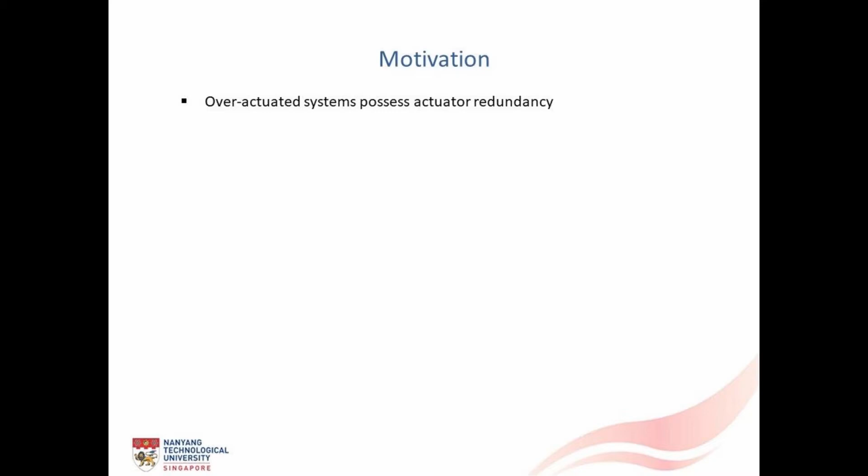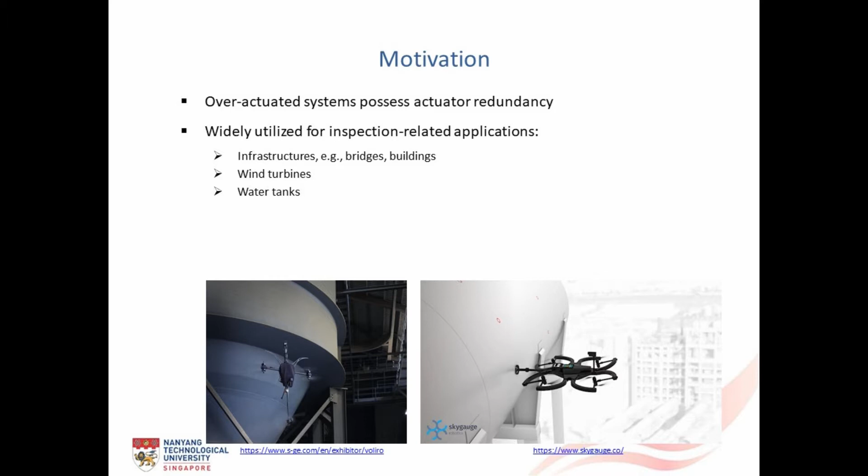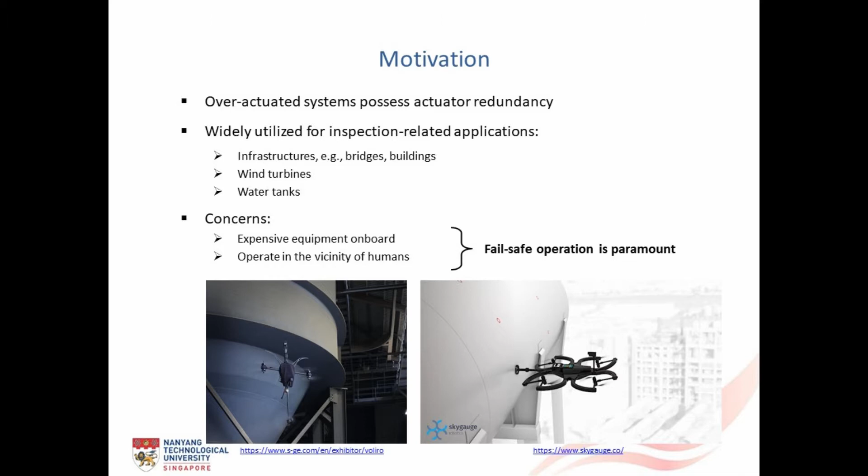Over-actuated systems possess actuator redundancy, thus rendering them highly maneuverable. As such, these highly maneuverable aerial robots are getting widely utilized for inspection-related applications in bridges, buildings, wind turbines, and water tanks. Mostly, these systems carry expensive equipment on board, including LiDARs, cameras, etc. Since they must operate in the vicinity of humans, their fail-safe operation is paramount to ensure safety.

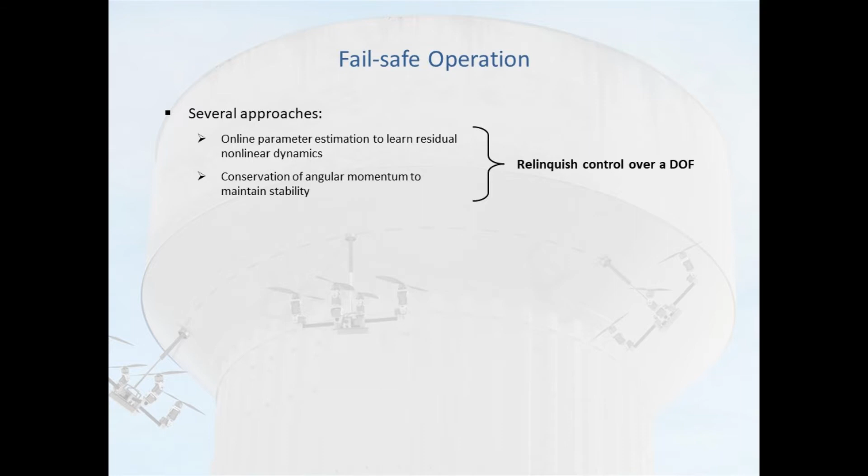Several approaches have been proposed in literature to tackle propeller failure in aerial robots. Among the approaches, the first is based on online parameter estimation that learns the residual nonlinear dynamics and subsequently updates the controller. Another approach revolves around the conservation of angular momentum to maintain stability. However, both of these approaches relinquish control over a degree of freedom. Thus, they are less viable for tasks requiring precise tracking, specifically in inspection-related applications.

Alternatively, an over-actuated aerial robot can handle failures while retaining control over its position and attitude. As such, its control allocation is reconfigured to exploit the input redundancy. However, their control underlies multiple challenges, including the determination of the optimal actuator allocation, as the underlying system is underdetermined.

In other words, since the number of actuators are more than the number of system equations, a unique solution is unavailable. Then there are actuator constraints due to the physical limits. Also, the dynamics become time varying due to the propeller failure.

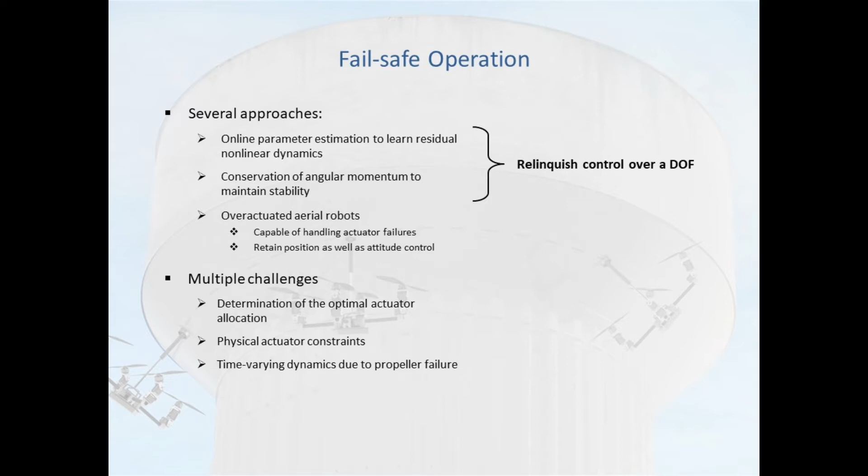Therefore, to ensure safe operation during inspection, we have designed and developed a hyperdynamic quadrotor aptly named as QuadPlus. The novel quadrotor design introduces additional degrees of freedom using biaxial tilting of propellers, rendering extensive thrust vectoring. Consequently, the quadrotor not only stabilizes but also maintains decoupled control over position and attitude even after propeller failure.

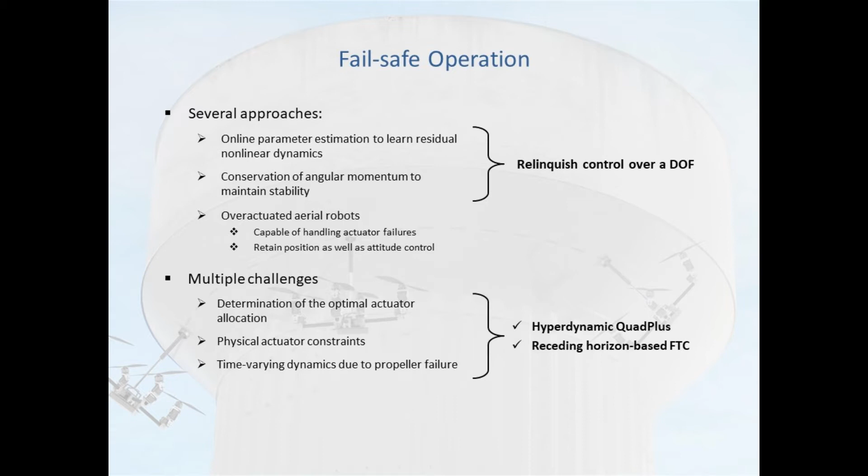Moreover, to cater to the challenges that underlie over-actuation, we propose a receding horizon principle-based nonlinear model predictive control framework in this work. The designed fault-tolerant control framework is centralized in nature that allows full exploitation of the actuator redundancy. I will illustrate the control framework in the upcoming slides.

Now, let me introduce our novel design. QuadPlus is designed to achieve extensive thrust vectoring using biaxial propeller tilting. Each arm of QuadPlus consists of two servo motors for carrying out independent rotation about the lateral and longitudinal axis.

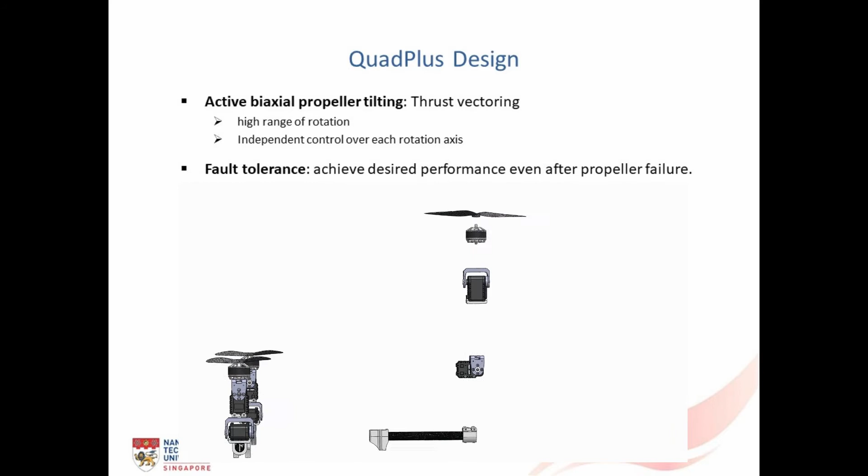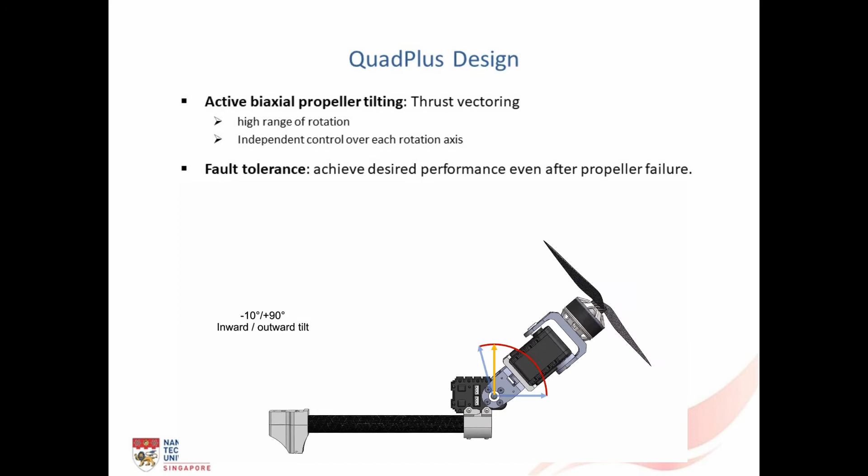Based on this vertically aligned configuration, the proposed design can accomplish an inward tilt of 10 degrees and an outward tilt of 90 degrees about the lateral axis. Similarly, it can accomplish a rotation of plus minus 90 degrees about the local longitudinal axis.

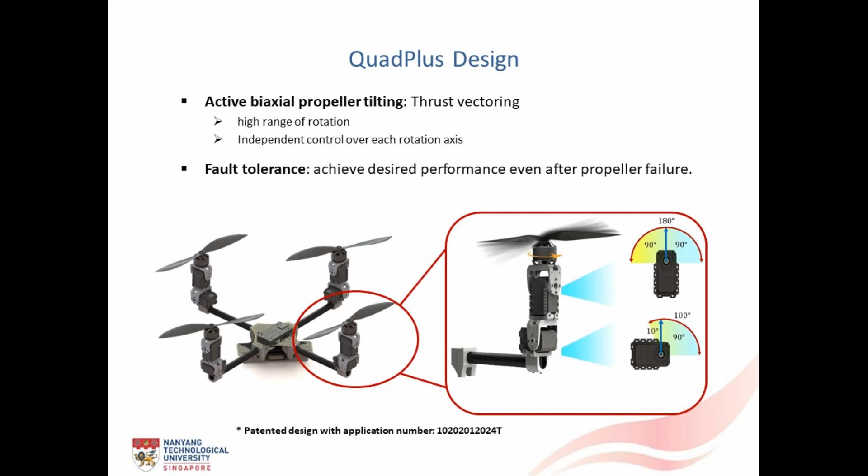With regards to the control of QuadPlus, its 12 degrees of freedom include the 8 servo angles and 4 propeller speeds. These 12 inputs can be used to control the 12 states of the system, that is, position, attitude, as well as linear and angular velocities. The fault factor gamma is introduced during thrust calculation in the simulation, wherein a value of 0 indicates propeller failure.

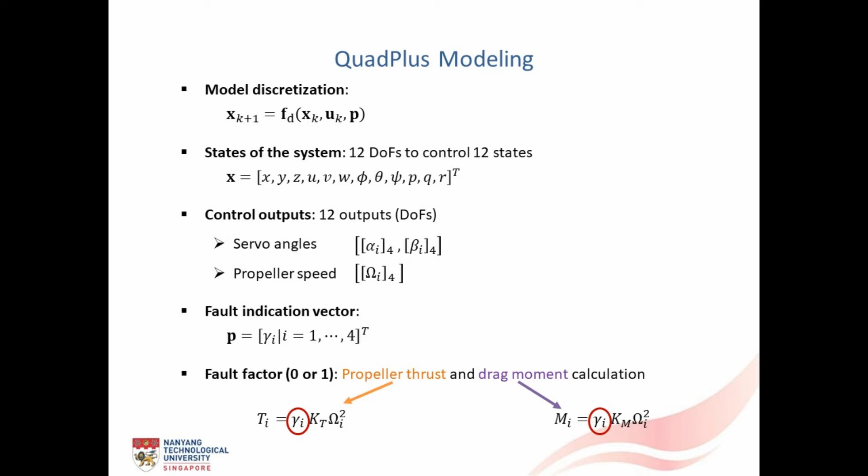The system dynamics involve modeling the forces and moments generated in the body frame. Due to the biaxial tilting, it becomes essential to consider the gyroscopic effects during the moment calculation. These effects are added to the moments generated due to thrust and drag moment of the propellers.

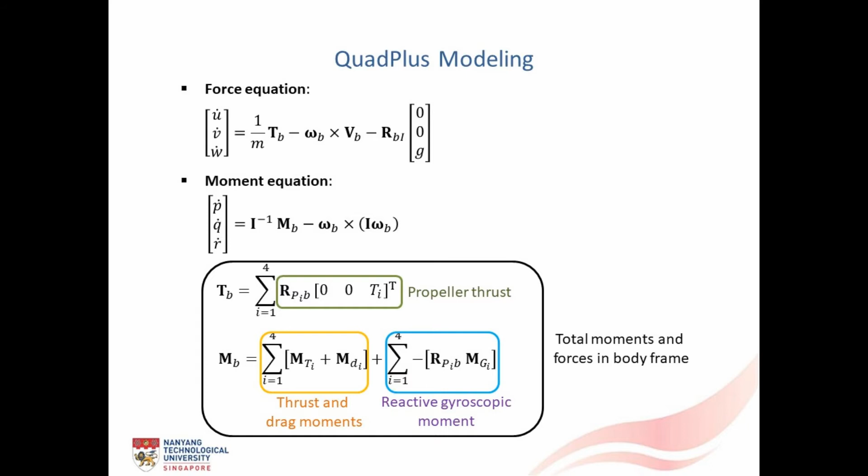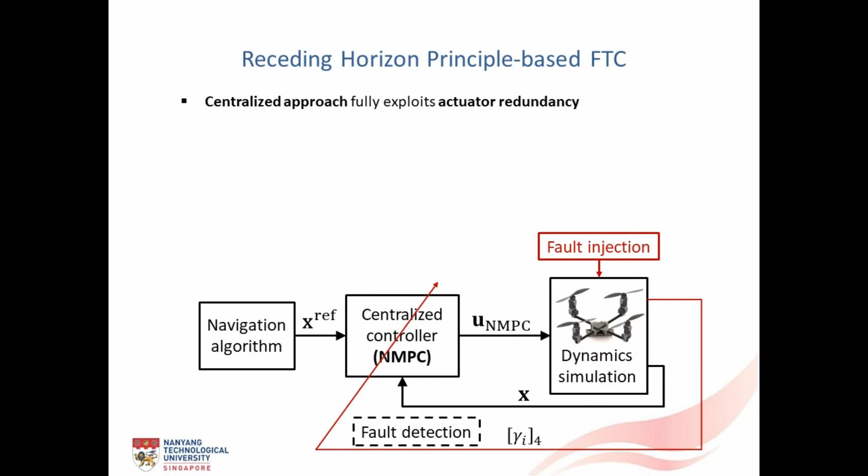Next, I will illustrate the fault-tolerant control framework. In this work, we have adopted a centralized approach that facilitates full exploitation of the actuator redundancy. As such, the designed NMPC algorithm is responsible for tracking both position and attitude references. Accordingly, it commands servo angles and rotational velocities of the propellers, which reflects the nominal operation of the overall system.

Now, as soon as a failure occurs, the designed NMPC reconfigures the dynamic model online based on the given fault information. In other words, the underlying optimal control problem is updated such that the control commands are allocated to the remaining functional actuators. Eventually, this reconfigurability circumvents the need for multiple controllers.

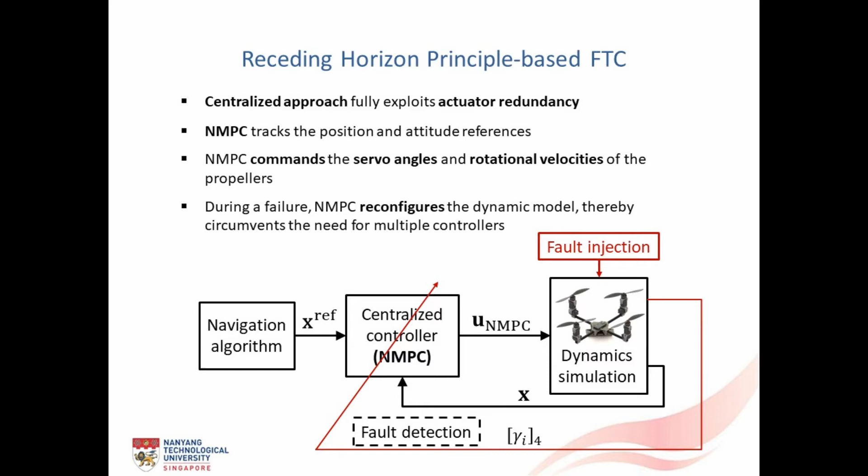Next, I present the design of the centralized NMPC. For tracking the given position and attitude trajectories, the centralized NMPC is designed utilizing a least square problem formulation, wherein the state, control, and parameter vectors are as presented before.

This type of problem penalizes the deviation of state and control trajectories from their specified reference values. These are the utilized state and control reference trajectories. While the state references remain same for nominal and faulty operations, the control references are obtained differently for each case. One may note that these control references are obtained via trial and error method.

Also, there are control constraints arising from the actuator limits. Furthermore, we have selected the prediction window size as 30 for the centralized NMPC algorithm.

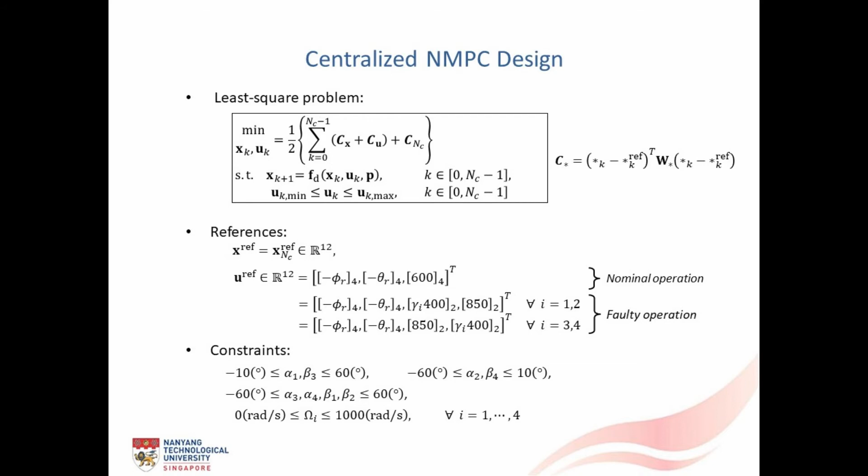Next, I will illustrate a case study wherein we implemented the proposed fault-tolerant control technique for the case of single propeller failure that occurs mid-flight. All the tests are conducted in MATLAB Simulink environment, incorporating the realistic model of the quadrotor presented previously.

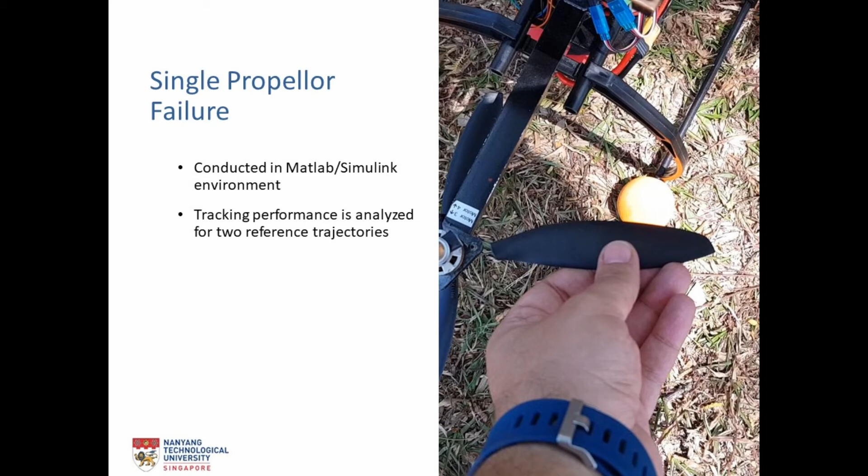The overall tracking performance post-failure is analyzed for two reference trajectories. While the first trajectory is typically utilized for inspection-related applications, the second one is an 8-shaped reference. Moreover, the tracking performance over the second trajectory replicates extreme operation that further challenges the controller. A fixed sampling time of 10 milliseconds is maintained for the entire simulation.

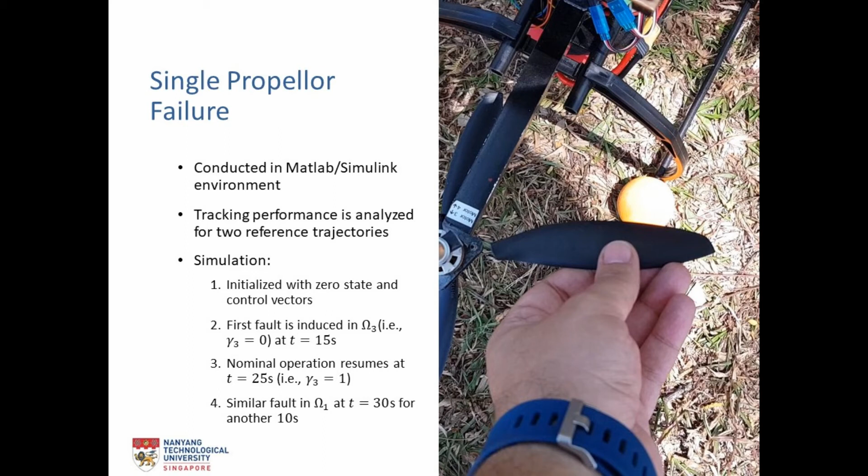During both trajectories, failure of propeller 3 is introduced at a time of 15 seconds for a period of 10 seconds. Subsequently, after the recovery of propeller 3, a failure is introduced, this time in propeller 1 at a time of 30 seconds for 10 seconds again.

In the inspection-oriented trajectory, after a gradual climb to an altitude of 1.5 meter, QuadPlus is commanded to reach a position of magnitude 1 meter for each of x and y. This is followed by gradual tilting to an attitude of 30 degrees in pitch and roll.

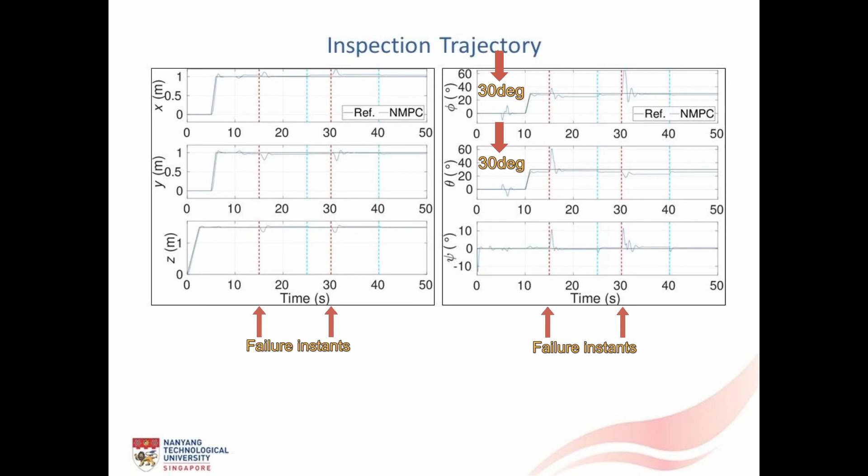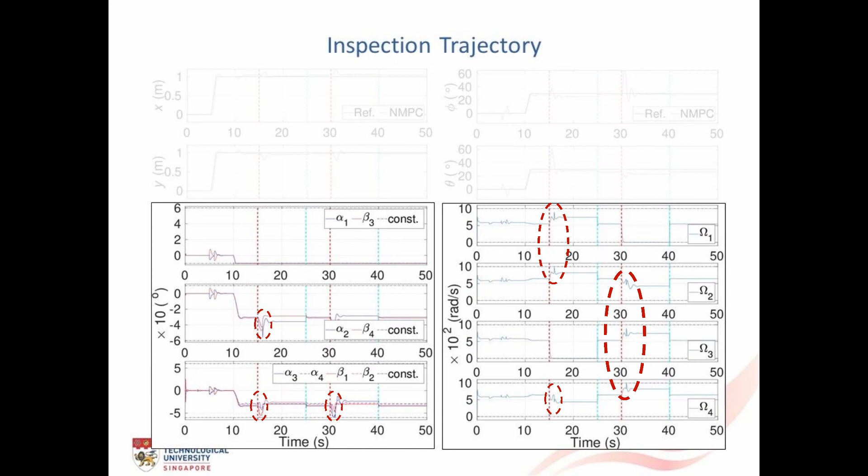Similarly, an 8-shaped trajectory of 1.6 meter width along the x direction and 0.8 meter width along y direction is commanded after climbing an altitude of 1.5 meter. Furthermore, an asynchronous sinusoidal attitude trajectory is commanded with the amplitude varying between plus minus 30 degrees for roll and pitch and 25 degrees for yaw.

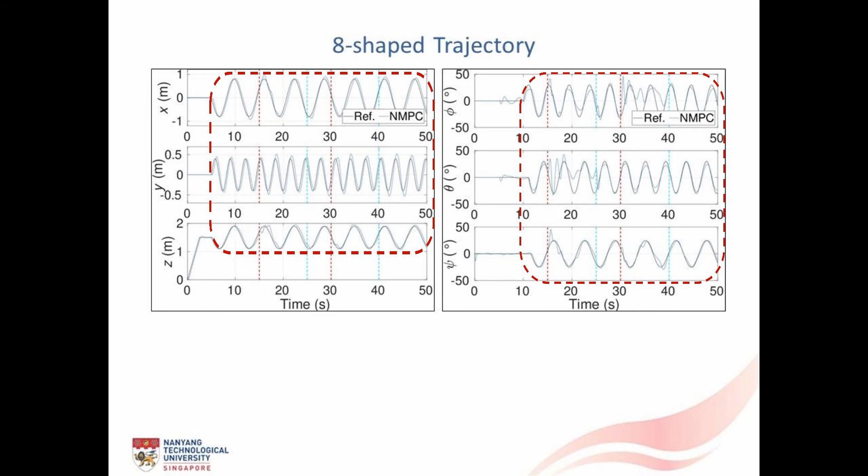As observed, QuadPlus continues to follow the commanded trajectory even with propeller failure. The control commands are found to be always bounded and also recover from saturation even after failure. Additionally, NMPC still optimally allocates the control to the remaining actuators even when two of the active servos are already saturated at the failure instance, thus validating the applicability of the control framework for fault tolerance.

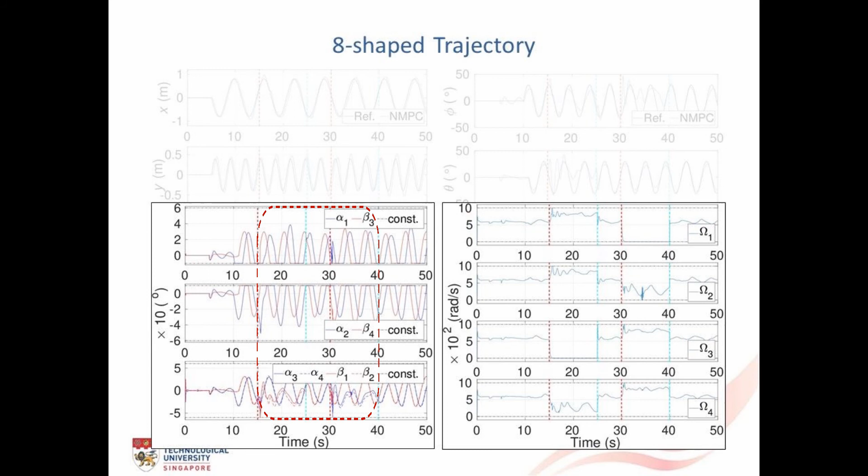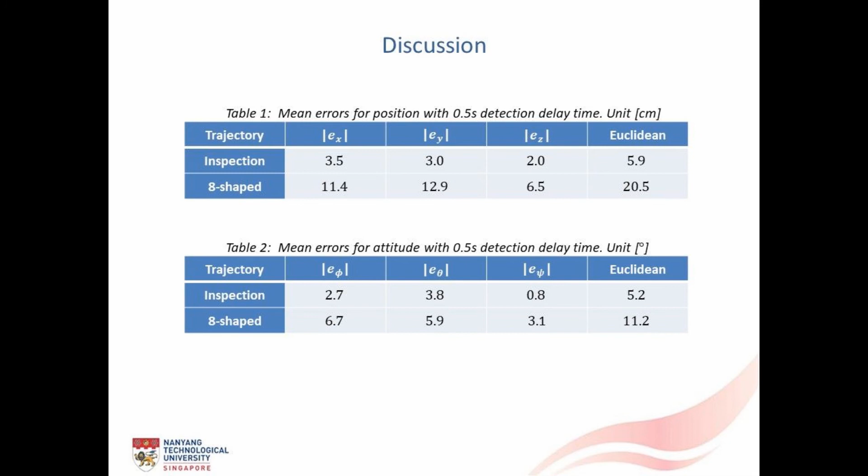To conclude, in this work, we have proposed a fault-tolerant control framework for a novel over-actuated quadrotor named QuadPlus. The design fault-tolerant control framework renders its safe operation during inspection-related applications. The centralized NMPC algorithm is the core of the design framework that safely recovers the quadrotor after completely losing a propeller.

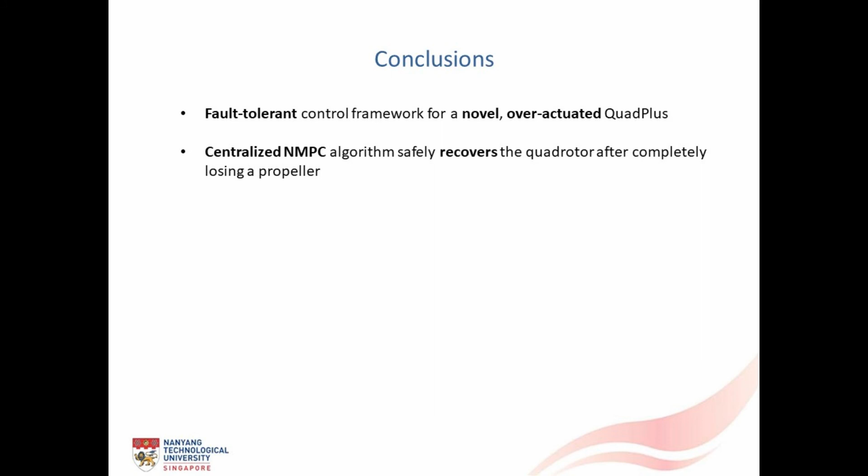Another compelling feature of the design NMPC is its reconfigurability that renders it as a universal controller for both nominal and faulty operations. This eventually eradicates the need for controller redundancy.

Moreover, the fault tolerance efficacy of the design framework has been illustrated via a realistic simulation model over 2 trajectories, while accommodating fault detection delays up to 1 second. The obtained results have displayed that the quadrotor continues to independently track position and attitude satisfactorily even after losing a propeller.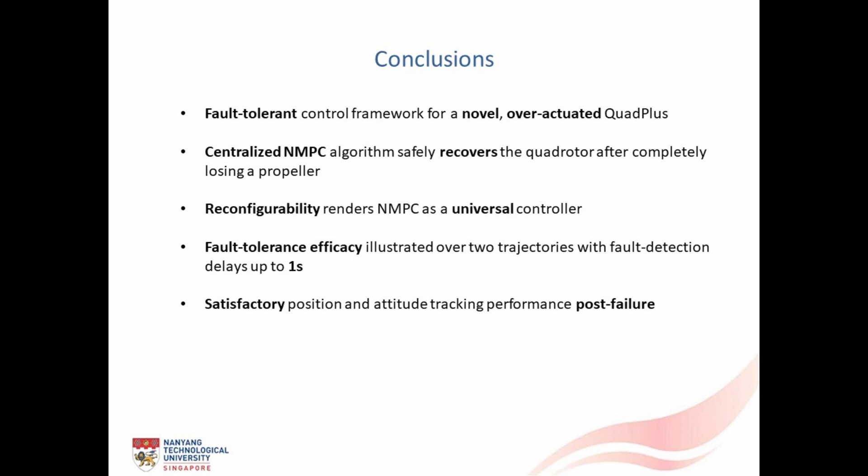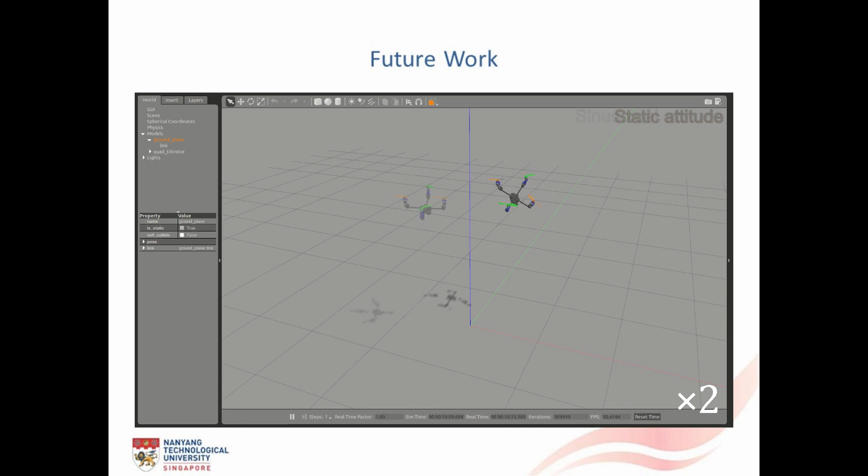Next, I would like to briefly describe the future work that is in progress. To achieve the real-time implementation of the fault-tolerant control framework, we started by modeling QuadPlus in Gazebo simulation environment. As can be seen in the video, QuadPlus simultaneously tracks position and attitude reference by exploiting actuator redundancy.